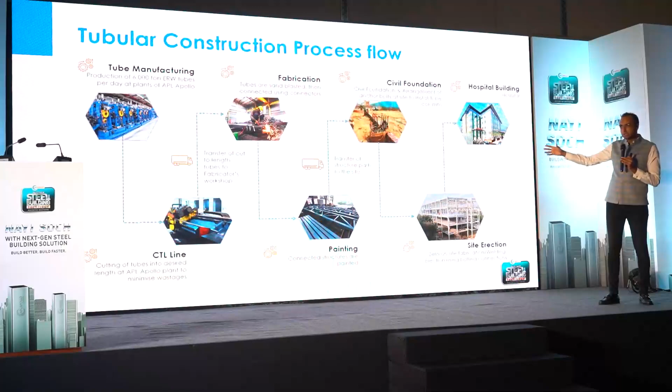Civil works, tubes get processed, fabricated, connectors get welded, and then the material goes on site, it reaches for erection. That's how we achieve the speed of 8 to 9 days per slab.

So one of the reasons, after interaction with a lot of friends in the industry, we figured out that there are like 5 reasons why designers from the structural world don't like to put more tubes in their designs.

The reason is the non-availability of larger sizes, which are required for high-rise buildings, and limited size range.

Large MOQs which tube companies ask from the contractors, from the developers, which makes the consumption of tube a bit difficult. High lead time as well, and wastage in tubes, which the fabricators have to carry cost for.

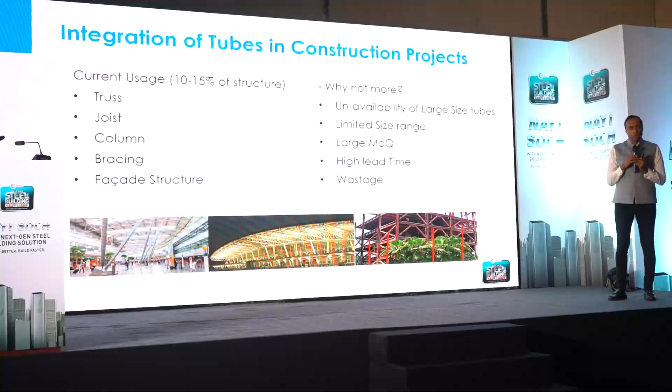So at APL Apollo, we have tried to work on all these concerns and address them, so that the steel construction, the tubular construction, becomes more beneficial to everyone.

Now the applications, what we have seen, what we're trying to promote, is for any kind of high-rise structure, whether hospitals, housing, schools, courts, hotels, malls, offices. Many large developers are present here.

We have people from Warehousing Association of India also, supporting warehouses, food parks, cold storages, factory structures, process buildings. For all these buildings, tubes are beneficial.

Aviation hangars, many fabricators here are working with the Airport Authority of India for hangars, and the very upcoming field, which is data centers.

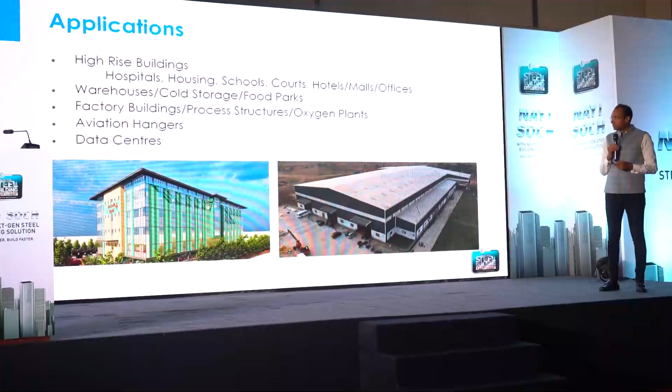So steel tube versus conventional RCC. This is the working where we see how we save time, how we save cost. There is already a proof of concept here.

Which shows that a steel building, tube building, can be constructed on an 8-day per slab timeline, versus RCC, which varies from 20 to 30 days depending on the complexity of the infrastructure.

I'm sure there would be some exclusive projects where RCC contractors must have achieved high speed, but that's very rare. We are taking the average.

You save 16 days per slab; for a high-rise 15-story building, you save 240 days, and then it can benefit you in terms of higher carpet area. Your project will start early, which will boost your internal rate of returns.

So the project becomes more financially viable. And against that, what we pay today is $3 per square foot cost, which is like 250 rupees per square foot.

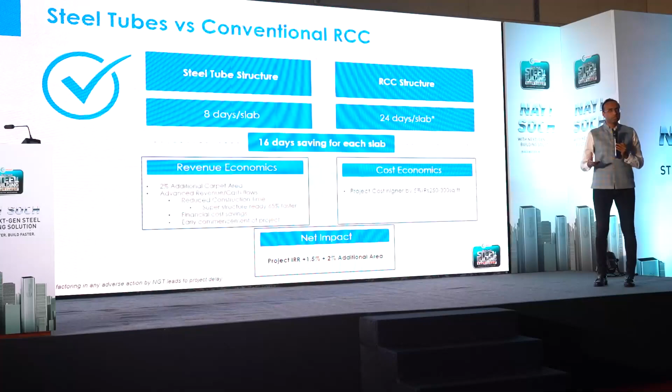Against that, if we factor in 2% additional carpet area, that will nullify the additional cost at just one go.

So these are the benefits. Construction time for the superstructure gets reduced by up to 30 to 50%. The project cost will be low if the building gets handed over early.

With early commencement of the project, whether it's a hospital, hotel, mall, or office tower, it lowers the financial cost, the finance cost.

We get the advancement of cash flows, better IRRs. The project is environmentally friendly. It doesn't add dust into the air, which adds to air pollution, and it doesn't consume groundwater, which leads to the depletion of groundwater levels, which Indian cities are facing right now.

There is a recyclability factor in steel. After 50 years, 100 years, you can disassemble the welding and benefit from the recyclability.

Strength is superior, resistance to seismic loading is better, so that's another benefit. And we have seen, we have done case studies where we also get extra clear height of up to 6%.

So again, NAYI SOCH is the theme here for tonight. The next NAYI SOCH is environment, which everyone is talking about, whether it's private or government. So there's a global study which suggests...

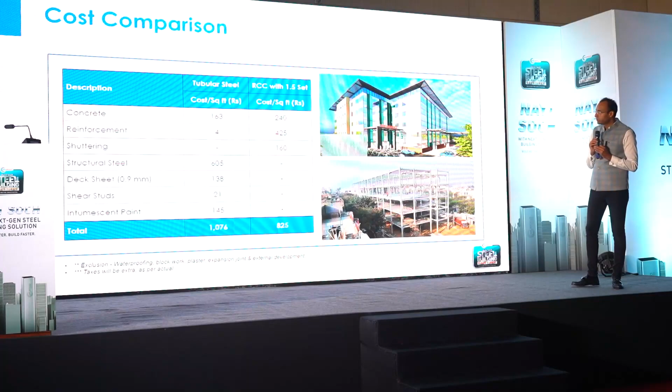This is the cost comparison I was talking about, 250 rupees per square foot. So these are the main factors for the skeleton of the building. There are six to seven factors: concrete, reinforcement, shuttering, structural steel, deck sheet, which takes care of flooring.

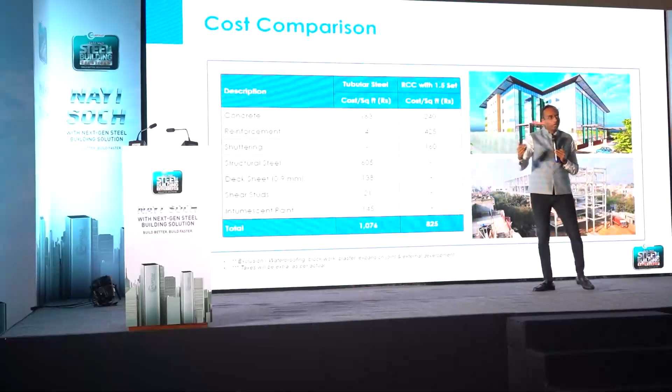Shear studs, and fire intumescent paint, which is a very important factor in steel buildings. This is tubular steel. This is RCC. Concrete is there in steel because we use concrete fill tubes. We have a super specialist from IIT Hyderabad, Professor Madhavan, who's going to talk about concrete fill tubes soon. We put reinforcement, shuttering, but you don't need that in tubular with structural steel, deck sheet, and shear studs. RCC structure could be 825 rupees per square foot, and steel is 1,076. So that's the 250 rupees per square foot gap.

Against that, the benefits are straightaway: in India, the average real estate price is 10,000 rupees per square foot. You get 2% extra saleable carpet area, which nullifies that cost on day one.

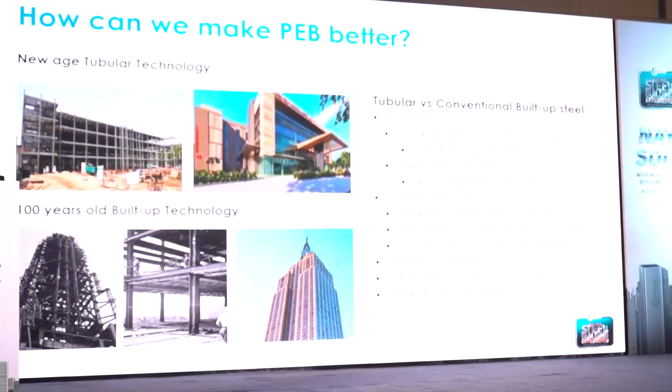The other thing we have here is how to make steel construction better, how to make steel efficiency better. Built-up sections have been used for ages. We have the Empire State Building, beautifully built 100 years ago, all on built-up sections. But how do we better this? How do we come up with something new?

What we are trying to propose is that if the structure is 100% tubular, we have seen that the project could be done 20% faster. The lead time for supply of tubes is much lower than making built-up sections by multiple fabricators.

The connections, some of the designs are here. We are doing a lot of research and we have used these designs on live projects as well. So connections are easy and project costs come down. For a built-up section beam, you need to shutter and encapsulate it. With tubes, we can get away with that, so carpet area gets added here. And the added benefit is less consumption of steel.

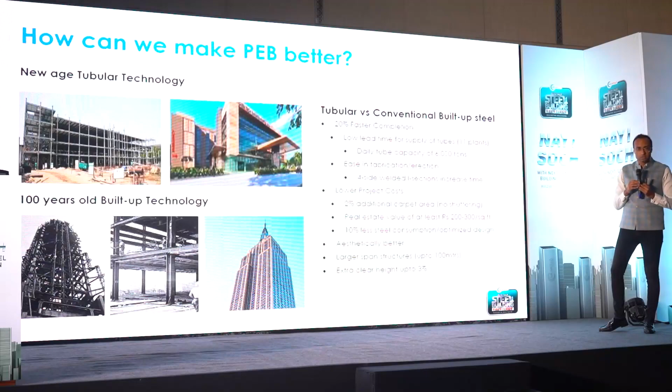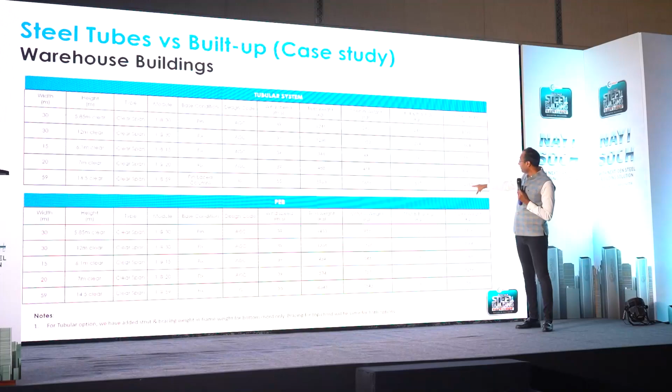There are many live examples and case studies which suggest that doing a steel structure on tubes versus built-up, we can save 5% to 20% steel. Tubes are also better for large span structures, and we get extra clear height with tube versus built-up. This is one case study where we took examples of multiple grades, with width 30 meters, height 5.85 meters, so that's the clear span. We factored in wind speed, truss weight, and column weight, and we found the frame weight in tubular is 12,000 kg versus 15,891 kg on built-up with the same parameters.

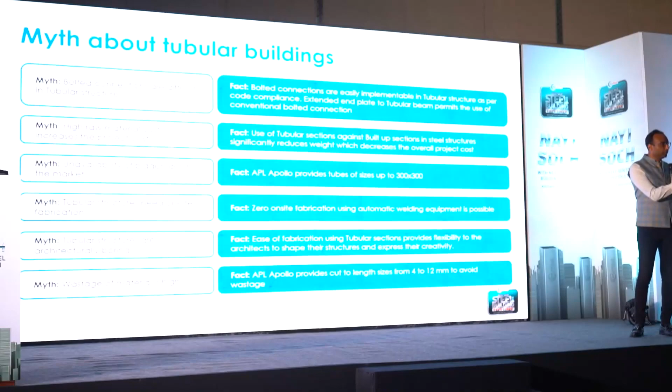These are some myths our fraternity has in mind, and we have tried to address all of them regarding tubular construction. One myth is that bolted connections are difficult, but that's not the case. We have live examples of these connection plates and connectors used in live projects.

Then, raw material cost is high. Yes, when you compare tube versus steel plate, it will be higher. But then the fabrication cost gets reduced, and ultimately on a per kg basis, the cost comes down.

Non-availability of large size sections — yes, but in the last 4 or 5 years, companies like APL APOLLO Tubes have worked quite aggressively to come up with larger size sections and make them available for contractors.

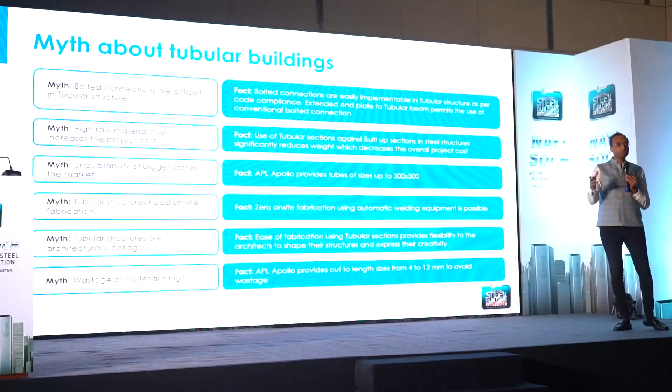Then the myth is that you need on-site fabrication. That's not correct. We have our friend from Sam India, who recently executed 25 lakh square foot across 7 hospital projects in Delhi, and they can tell you that 15,000 tons of structural steel was fabricated, and hardly 1% of that was done on site.

Then there's the myth that wastage of material is high — that's another reason why fabricators shy away from using tubes. But at APL APOLLO, we send cut-to-length sizes to the fabricator. So if the design requirement is 4.5 meters, 7.2 meters, 8.9 meters, whatever, we cut the tube to that size and deliver it to the fabricator.

And I don't know why my team put this, but the myth is that tubes are boring — that's not true. In fact, architects use tubes to improve the aesthetics of buildings, whether it's an airport or a railway station.

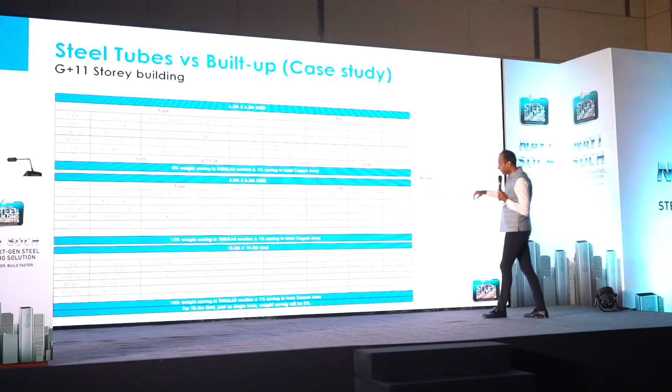This is the same matrix for G+11 story building. We'll see that the weight of the structure for a 6.3 meter by 6.3 meter grid in tube is coming 6 tons, and in built-up it is coming 7.3 tons. For 8.3 meter grid, 11.7 tons and 13.2 tons for 10.3 meter by 10.3 meter grid. Again, tubes are showing better results, so there's a clear saving of 10% even in high-rise structures.

And then the other benefits are high carpet area, because for a built-up section you need to shutter it, you need to encapsulate it. In tubes you can get away with that, and you can build more carpet area.

Now this is what we are really proud about, and the reason why we requested everyone to visit us, because with that conviction and confidence that yes, it can be done, we have done this: 7 hospital buildings, 6 sites given to the contractor Sam India. 2.5 million square foot, 15,000 tons of steel work done in an average of 90 days. When we calculate, the fabrication drawings were finalized, and within 90 days 15,000 tons of steel was manufactured, dispatched to the fabricators, fabricated and erected on site.

I'm sure Mr. Karan Agarwal from Sam India will take you through the journey of this and share his experience.

Now we are working on a lot of other structures, whether it is hotels, night shelters, or office towers. We have our friend from Supertech, Mr. Khanna, who recently got a G+15-story building in Noida on tubes. The work is yet to start, but I'm sure they'll be happy to share their experience on the same.

Group housing projects also we are doing. One case study again to strengthen our viewpoint of built-up versus tubes: this was a 13,000 square foot oxygen shed building, which was done in 15 days. Mr. Jitendra Chok from Fab India did that, and he's present as well.

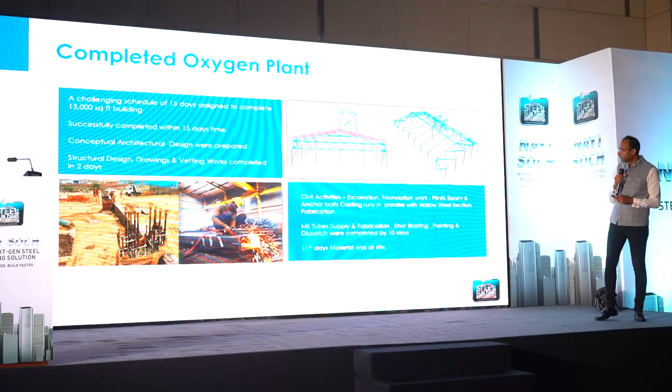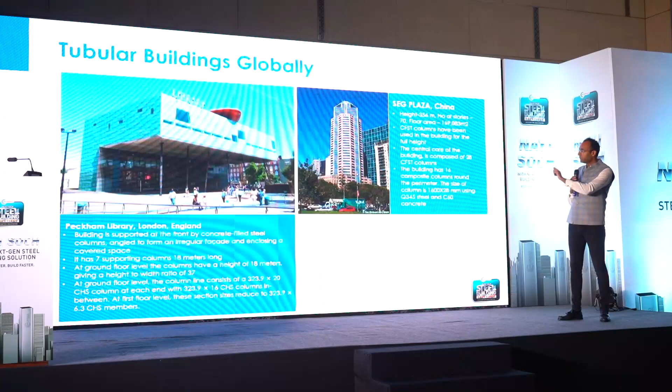And then all the aesthetically good buildings. Dr. Anubhav Gupta, our friend from Skeleton, has done a group housing project in Jammu, all on tubes. And then again China has another 70-story tower, and London, which is a more aesthetically pleasing city, they have also used tubes to make their buildings beautiful.

So why don't we see many of these examples in India like we see outside? I guess it's that 250 rupees per square foot extra cost which everyone calculates. India is a price sensitive market, so people shy away from going on steel. In India, project deadlines don't matter much; we know developers and contractors keep delaying their projects, and there isn't a very harsh penalty for the industry. RCC work can be done with unskilled labor, but in steel you need skilled labor. India is also the second largest producer of cement, so availability of cement makes it easier for contractors to go with cement RCC.

Last section, tubes are also not available easily, so that's another factor which stops contractors from using steel, and high grade steel also.

Before we started this presentation, I was having a chat with Professor Madhavan from IIT Hyderabad. He was insisting that we have to take a quantum leap now to talk about not 350, not 450, not 550, but 690 grade steel. I'm sure with such visionary outlook from friends like Professor Madhavan, we're going to take that leap soon. Also, not many contractors carry expertise of quality engineering and workmanship, but I can proudly say that there are PEB contractors in this very room who are capable of doing very good work on steel structures.

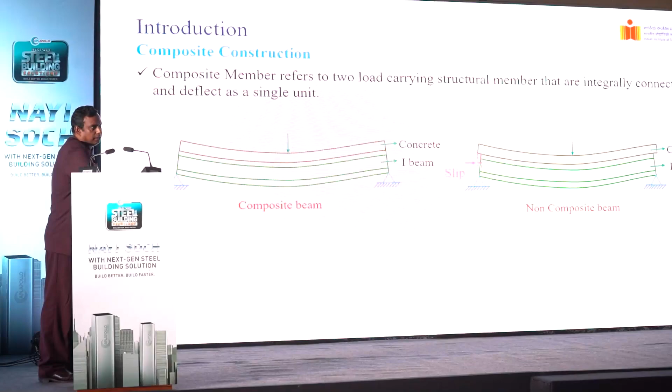When you look at composite members, there are two load-carrying members integrally connected that behave as a single unit. On the left is a composite beam, and on the right a non-composite beam. It looks the same, but when you load the structure, there will be slip on the non-composite beam, while there will not be any slip on the composite beam. So compatibility is established in a composite beam, whereas slip occurs in a non-composite beam.

As I told you, you have a tubular structure, and you add concrete to that, and what you get is a composite tubular structure.

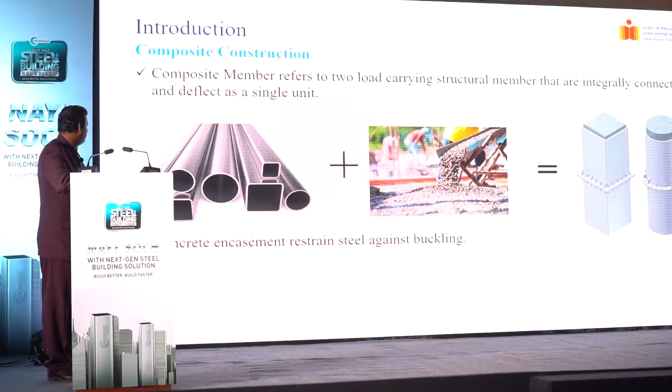What does concrete actually do, and what does steel do? Why can't we just use a tubular structure — why do we need to fill in concrete? Can we make it light by not filling it? Why should we have concrete in it? The major reason is simply to prevent what is known as local buckling.

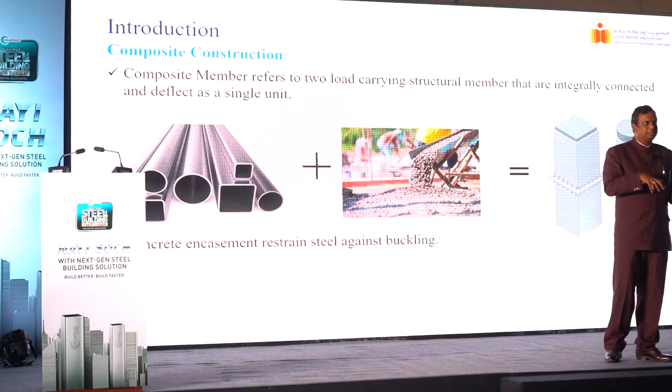You want to reduce the quantity of steel and make the sizes bigger, but if you don't put something in it, there's a possibility it could buckle inwards, which we call local buckling. So to prevent local buckling, if you add a material like concrete, it adds strength while also preventing the formation of local buckling, which is an undesirable failure mode. What we need to achieve is the complete ultimate load capacity, so reducing local buckling is the goal.

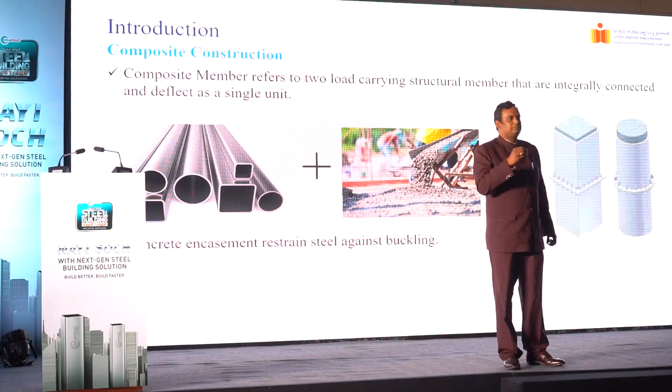Another important thing about concrete is that it acts as a heat sink. When you have a tubular structure subjected to fire, steel tubes don't have a chance — steel is a very good conductor of heat, leading to failure of the structure.

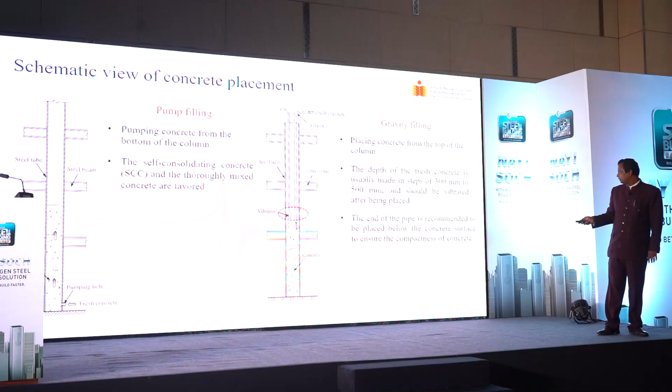In terms of component behavior, the most useful component from a strength point of view is a tubular structure, but there are some challenges with connections in circular tubular sections. From a strength point of view circular tubular sections are very good, but for connections and aesthetics, square and rectangular hollow sections are often preferred. The confinement provided by the steel tube is much higher, so the load-carrying capacity, simply because of the geometry, is much higher in a circular tubular section.

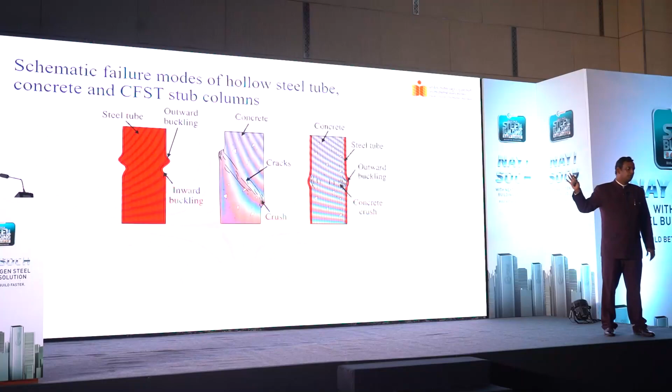This is how the failure mode would look: if you look at the steel tube, it has both inward buckling and outward buckling. This is what I call local buckling, which I mentioned earlier when introducing the topic.

I move around once in a while because I was told that if you move this way, people don't sleep. When I teach a class of 20 to 30, it's a class. When it's more than 50, it's a performance.

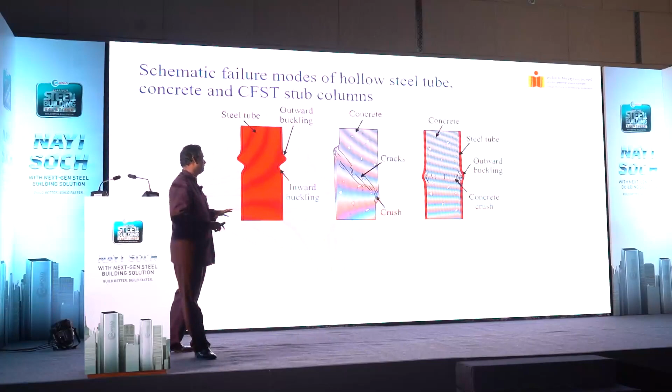So you have this inward and outward buckling. This is a steel tubular structure, but if you have regular concrete, then you have cracking and crushing that takes place at 45 degrees. But when you add the two together, you drastically reduce your inward buckling.

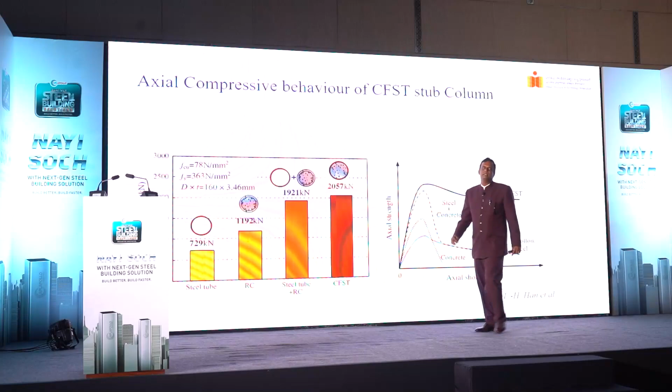Why is ductility so important? Because that is the only weapon we have to protect structures against seismic effects.

Our nation in 1970 had different seismic zones - Zone 0, 1, 2, 3, 4, and 5. Then somewhere down the line we discarded zone 0. Then we said zone 1 is also gone. So now we have zones 2 through 5 - low seismic, mid seismic, high seismic.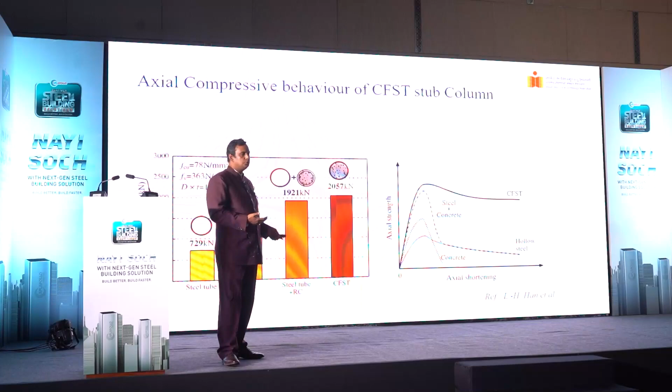So we cannot escape seismic activity. We have to design every structure because some level of seismic activity is bound to happen, because plate tectonic movements have occurred such that we have to design for seismic forces. We cannot run away from the problem; we have to confront it and solve it. And the only solution that we have today is tubular sections with concrete infill.

When a steel tube is subjected to tension, you get a crack happening at the center, a big crack. But when you fill it with concrete, you get micro cracks instead, so the member fails in a ductile manner. When a member fails in a ductile manner, it is a desirable failure mode.

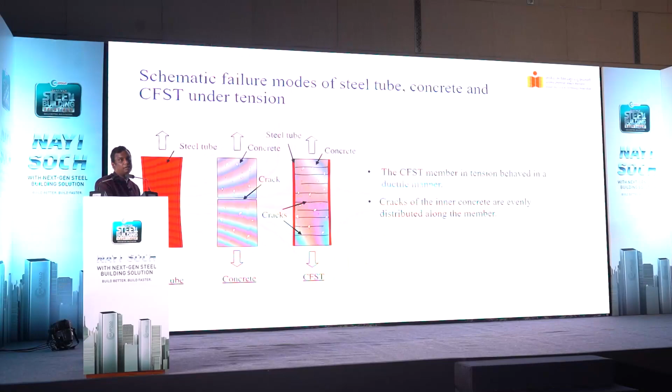Then we subject it to torsion. The steel tube alone doesn't resist very well, and concrete alone also develops cracks. But when you put concrete inside a steel tube and try to twist it, you get much higher resistance against torsion for the infill concrete section.

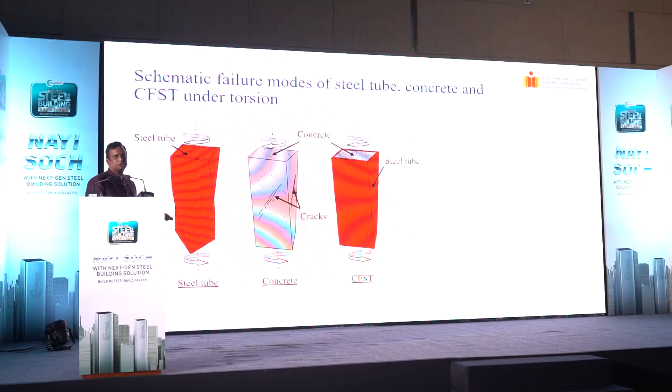So what are the applications of CFST? Usually it's the main columns in subway stations. That is when I think CFST structures became more popular. In underground subway stations, size matters because you need more space for trains, not for columns to occupy. The strength of the structure is important, but functionality is more important than strength. So reducing the size of columns becomes a challenge.

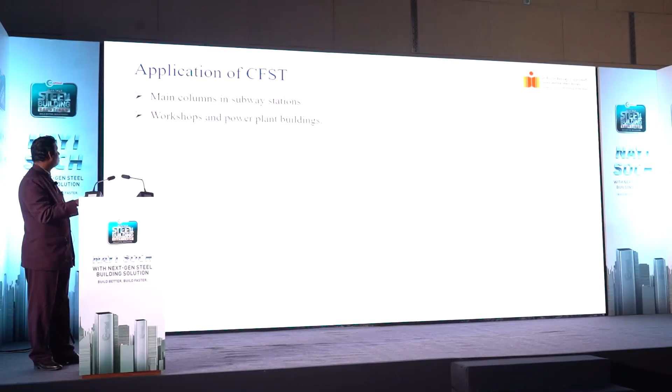So they went for tubular structures filled with concrete in most subway stations. This is common in most developed countries, like Singapore, where a lot of underground subway stations use this. New York has a lot of subways too, and London - all these use a lot of tubular structures. Workshops and power plant buildings need more land space. Again, high-rise buildings, multi-story columns and beams - they all have industrial and tubular structures.

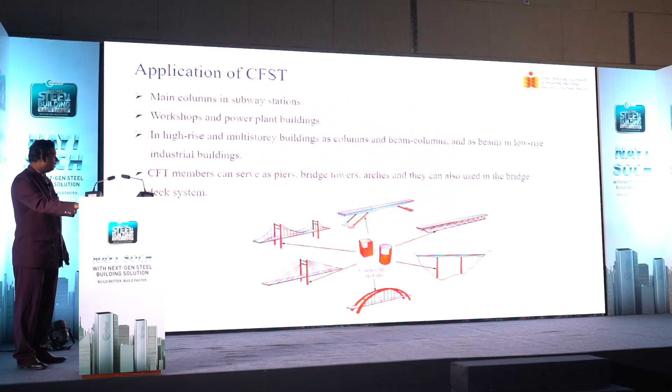Now this is very much used for bridges. Bridges are picking up in India, and tubular structures are key to achieving large span structures. This is another application, especially in China - they have taken it to another level, because a lot of transmission towers in China use these tubular structures filled with concrete.

We also have these kinds of structures, especially if you are in Hyderabad coming to the airport - you will see a lot of these tubular structures, but they are not infilled with concrete, just dummy tubular structures, so the sizes are huge. The objective is to reduce the use of steel and concrete, but still achieve what we wanted. Infilling concrete inside a steel tube does wonders for us.

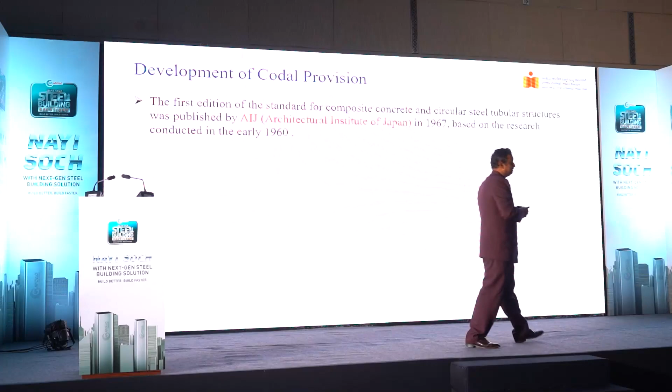So let's talk about some hi-fi stuff like codal provisions. The first thing that was done was in 1967, based on research done in the 1960s with the Japanese. It was published in Japan in 1967 by the Architectural Institute of Japan.

So when you think about architecture, don't think about architecture in India. In Indian architecture, the fellow will not touch structures even with his left hand. But in Japan, all buildings come under architecture, while all non-buildings - bridges, towers and other things - come under structural engineering. So the Department of Civil Engineering has structural engineering which does everything except buildings. The Department of Architecture also does structural engineering, but they are focused only on buildings. So architecture in Japan means something a little different.

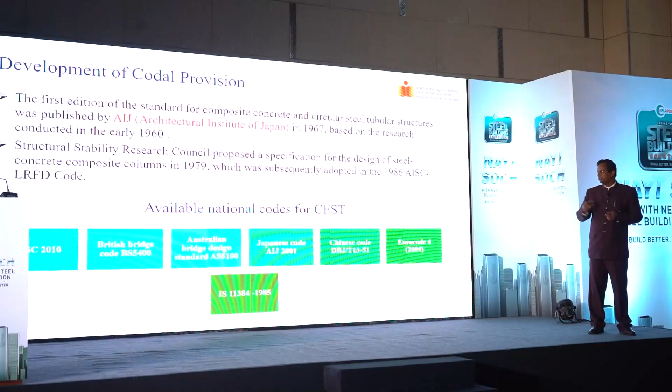Then there is something called SSRC, the Structural Stability Research Council - they came up with a code in '79. These are some of the codes: AISC 2010, British code is there, Australian code is there. Of course British code is now not very effective - it has been morphed into what is known as Eurocode, and Chinese code is there. And last but not the least, we have a long way to go - tubular structures code is also there, but R&D has to be done significantly into the technical content of the code.

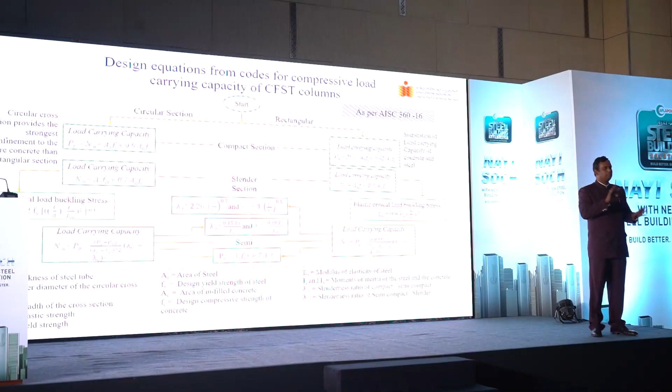Circular section, rectangular section. Just to understand, the gist of it is the strength comes from three components: one is the steel tube, one is the infill concrete, and inside the infill concrete, if you put a rebar, that also adds strength. A plus B plus C is the total strength. That is all they are saying by adding this. So this is steel, this is concrete. Since we are not talking about rebar inside, I neglected that term. So you add these two together.

Why is it 0.85 for rectangular and the same thing is 0.95 for circular? Because circular is better in resisting local buckling. So the code inherently recognizes that and gives an additional 5% discount for people who are using circular sections.

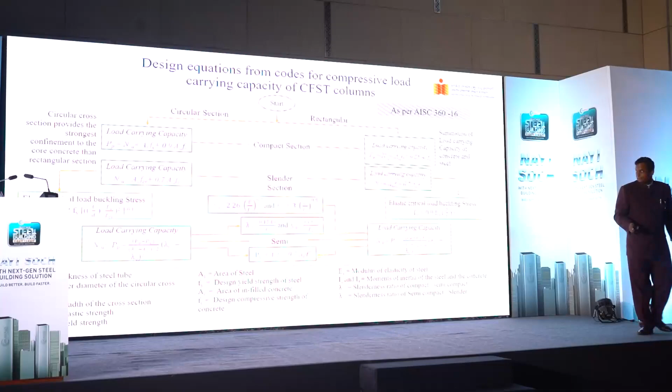That's the okay, so this is all the gist of it, but it's all available in the code. I didn't do anything new, I just put it together. This is how you design it, but nothing fancy. You just put it in an Excel sheet. A 10th grade fellow can put it.

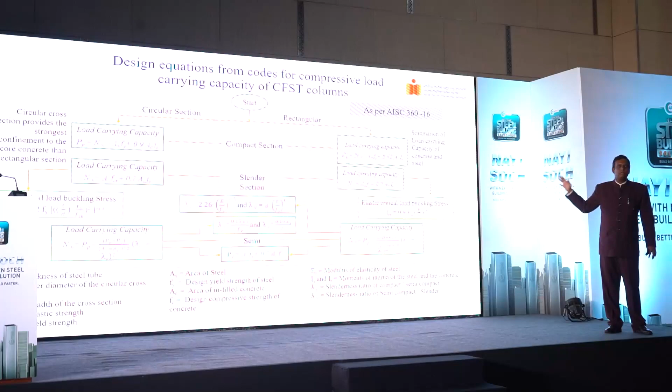What is most important is not to do all these calculations, but to have a general view of: is it making sense? Am I doing the right thing? What is wrong? Is it the connections, or am I putting the concrete correctly? Is the strength the problem? The thickness the problem? Slenderness the problem? That kind of intellectual thinking is more important than running day-to-day things. I do understand that design offices run on a production basis, but it's equally important for you to understand the basics of the philosophy behind these things.

Again, this is for the BS code, same thing. But rather than this, they say circular as well as non-circular. Here they have these three components: steel component, concrete component, as well as the rebar component. They have all these equations that you plug it into.

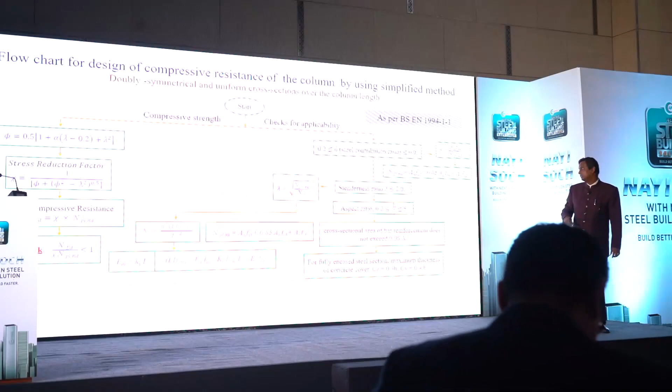Again, this is another thing called the simplified method. So the other one apparently is a complex method, so they came up with the simplified method. It's all the same, but if you ignore the right side portion, this is just the checks.

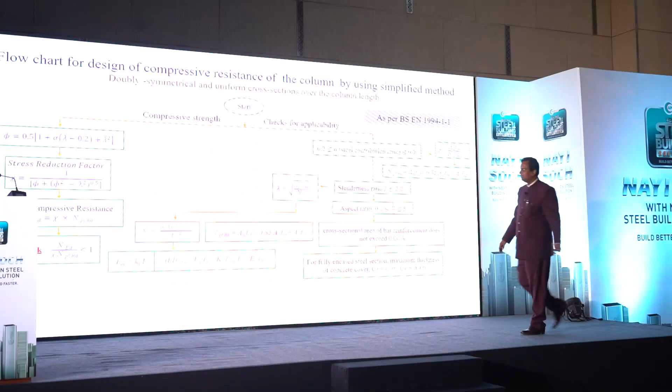This should be familiar to all of you because this is a regular steel design, IS 800 type of structure. So what you see on the right side is just the jugglery you have to do to make sure it works there. But on the left side, what you see is day to day: phi factors, stress reduction factors, lambda factors, and this is an imperfection factor. Alpha is an imperfection factor. This is a slenderness ratio. This is a phi factor, and this is the reduction factor that you multiply by using stress.

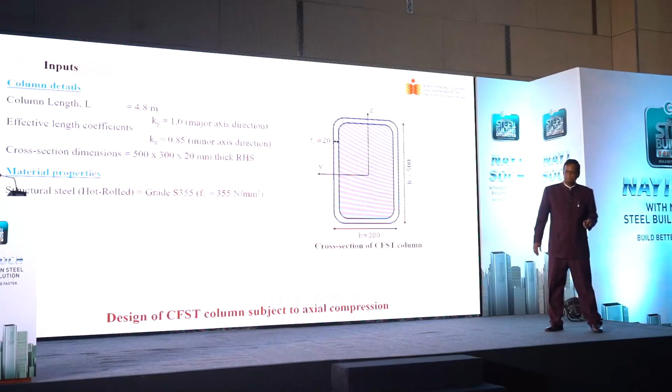I don't want to go into the details because I didn't know I was given only 15 minutes. So sometimes I tell my people I'm worse than a politician - if you get a mic, I will not come out. So I just want to show you that it's not that difficult.

It's just something you can do very quickly if you know the basics of it. You just do all these things, and then you say this is what it is: major axis slenderness, minor axis slenderness. And then put it here like this, okay. And there you go.

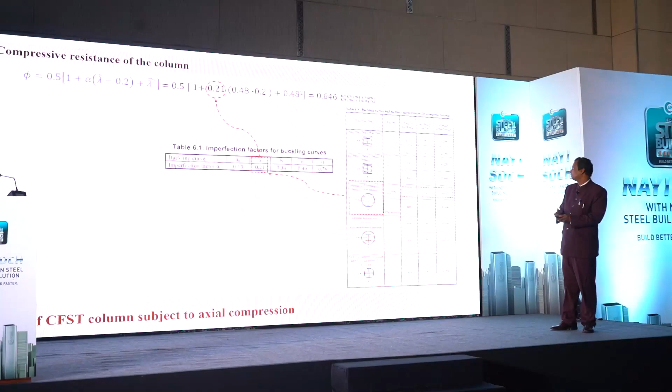And this is where the Eurocode comes into picture. You have a circular section, then you have this code, and they say that the imperfection factor alpha is 0.21 because it should be the a buckling curve. So you put it there, get the phi, voila, you get it done.

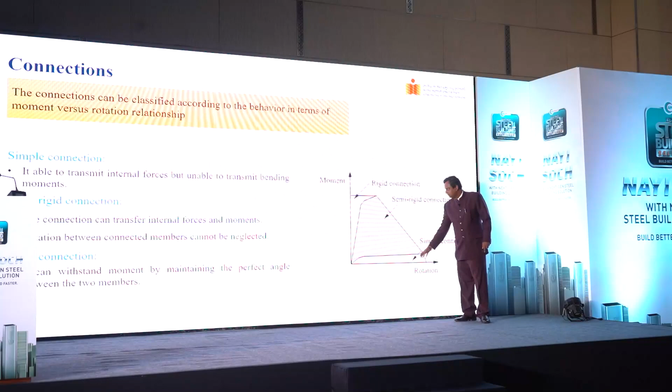So what you see here is the simple connection. This is the semi-rigid connection. This is the rigid connection. But just for your information, a rigid connection is also not truly rigid. If you can achieve 90% rigidity as per American standards, it's classified as rigid. You're almost there, so you don't look for 99.9% accuracy - if you're more than 90%, they classify it as rigid.

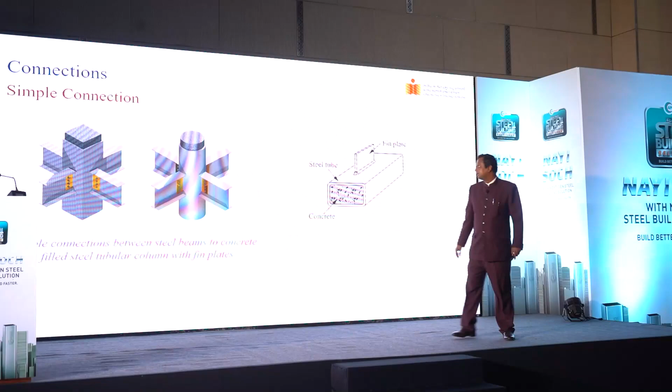So these are the simple connections that you can see. This is what we call the fin plate, so you attach the fin plate here. That is the yellow color stuff that you see here, and then you have an I-section attached to that, and that is how you make the connection. And then this is a simple beam to column connection.

Connections are very, very important, my friends. Okay, very, very important. If you know how to do connections, I think you will be a very good structural engineer because you need a little bit of understanding of everything. Members rarely fail; the failure usually starts with the connection. When the connection fails, it does not fail by itself - you bring 2 or 3 members together along with it. So that's the problem with connections. Dealing with connections is extremely important.

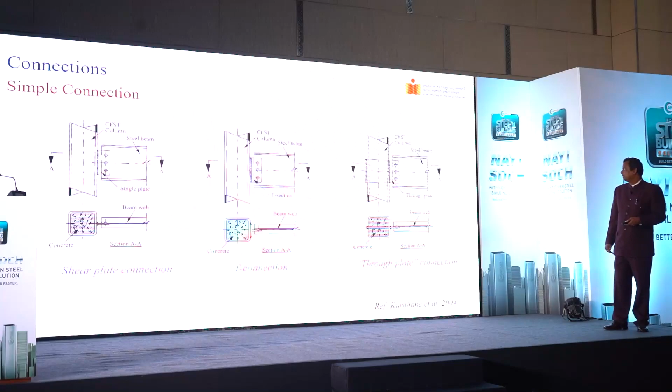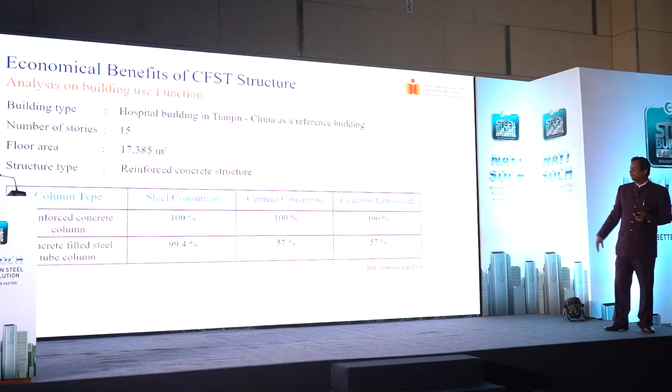Okay, economical benefit of CFST, this is just some type of thing. I think Mr. Gupta had already talked a lot about it, but I just wanted to give you a brief feel for it. Actually, the cement consumed is much lesser, the concrete consumed is much lesser, and the strength is very good.

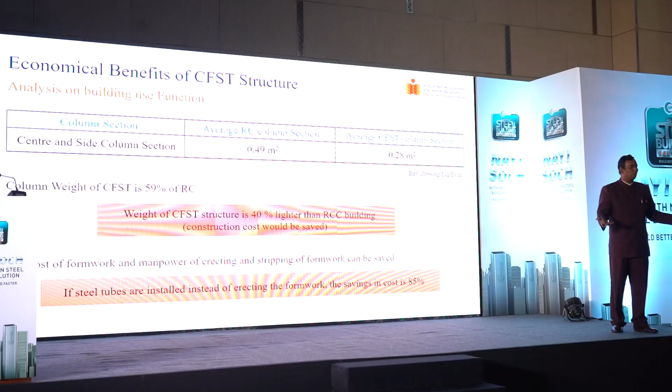A lot of formwork gets stolen because it's steel, right? So when they strip the formwork and keep it in place, some people come in a truck and say that they have been asked by a contractor to pick it up and take it, and then the next day the real contractor comes and says, where is my formwork? It's all gone. So taking care of formwork is also a full-time job.

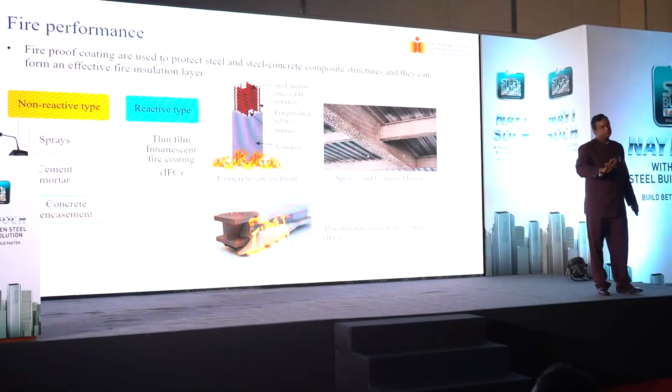Two years back, I was in Japan for this, prior to COVID, just 2-3 months before COVID. I was taken for a tour of the new steel structural buildings that were built for the Olympics, which got postponed, I believe - it was supposed to happen in 2020. Fabulous work, fabulous work. Okay, but when I looked at it, this is what they have used - they just used sprays and cement mortar to act as a fire protection mechanism.

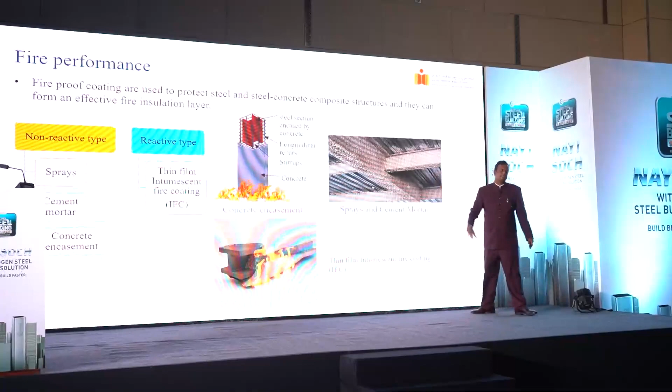Okay, intumescent coating - the building where my office currently is has intumescent fire coating. So what is intumescent fire coating? I don't know, perhaps everybody knows it or not. It's very similar to what you have in an airbag in a car - impact, right, sudden impact, it blows, right? It just gives a space. Same thing happens in intumescent paint.

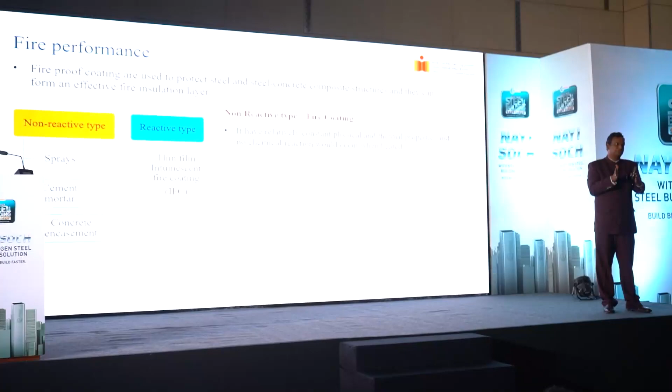When you get heated, the thickness of the intumescent paint increases by 50 times. When it increases by 50 times, it reduces the amount of heat that would be absorbed by the steel structure by providing a protective safe net, I would say. Okay, again, gory details - test results show that by providing the intumescent paints and other things, you can simply increase the fire rating.

Recently used to build a hospital structure in just 150 days. PWD planned 5 hospitals last year. Structural work at all the sites is almost done. The 1900 plus bedded GTB hospital was the largest built-up of more than 6 lakh square feet.

Conventional construction technology would have been too time consuming. The pre-engineered steel tubes were selected to complete this challenging project in less time. 80 to 90% of the structure was built on 4 section sizes.

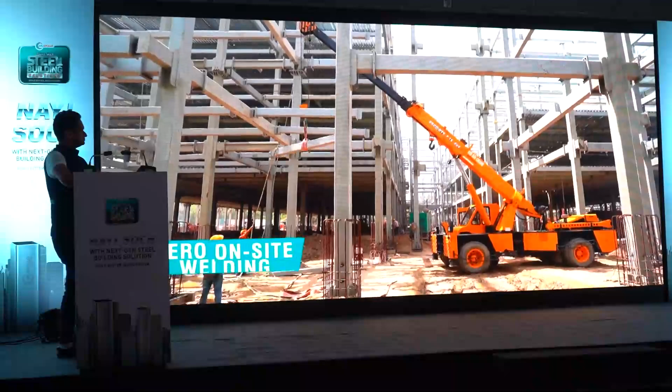Drywall and deck slabs were erected and cast on tubular steel structures. All steel fabrication work took place at fabricator workshops with zero on-site welding, only structure assembly with high-strength bolts. This was made possible only with APL APOLLO Steel Building Solutions.

Thanks to tubular construction that offered the perfect balance of speed, quality, cost, and environmental friendliness. APL APOLLO Steel Building Solutions give you lower project times, easier execution, and structure optimization. APL APOLLO Steel Building Solutions, a true revolution for future construction.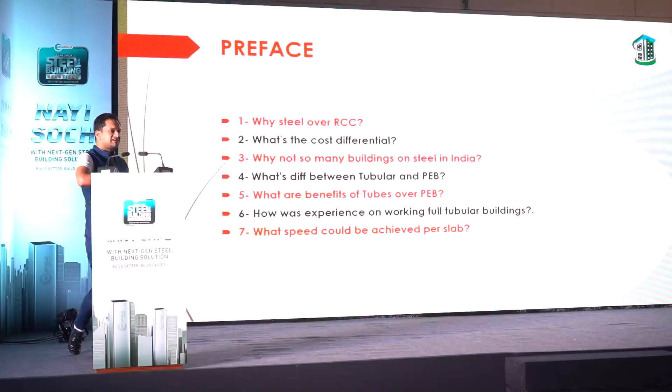Why we consider steel over RCC. Now, with the experience of completing these hospitals in a record time of 150 days, we are in a better position to answer why steel is considered and preferred over RCC. What is the cost differential between PEB structures and tubular pipes?

Why aren't so many buildings in India made of steel? What's the difference between tubular and PEB? What are the benefits of tubes over PEB? How was the experience of working on full tubular buildings? What speed could be achieved per slab?

This is the question which we were also doubtful about before starting these 5 hospitals, which we started in the month of November 2021. So after completing these 5 structures in a span of 150 days, we can recommend to any contractor, builder, or establishment who wants to finish the building in a span of 9 to 12 months, irrespective of stories.

The first best benefit we felt after completing these hospitals was the speed. Steel structure speed is the fastest we have accomplished in the last so many years.

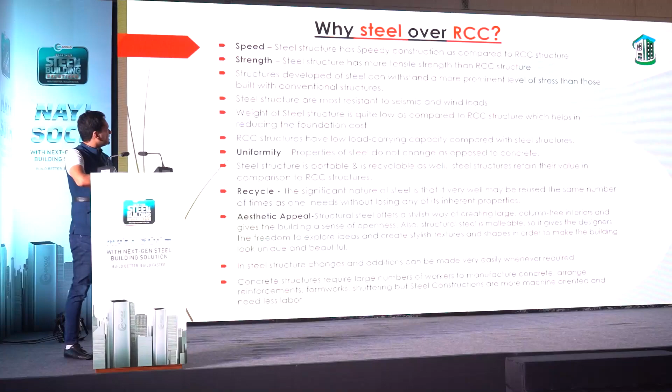The steel structure has more tensile strength than RCC structure in any case. Steel structures are more resistant to seismic and wind loads. The weight of a steel structure is quite low as compared to RCC structure, which helps in reducing foundation cost. This is the most important point, that it actually gives a cost saving to any establishment going for new construction.

Then comes the point that RCC structures have low load carrying capacity compared with steel structures. The third part is uniformity: properties of steel do not change, as opposed to concrete. Steel structure is portable and recyclable as well. Steel structures retain their value in comparison to RCC structures for the coming 60-70 years.

Recyclable. The significant nature of steel is that it can be reused as many times as needed without losing any of its inherent properties. So after 50 years, if we get bored of the design, we can demolish the building, recycle the steel, and put the same steel into a new concept and design. So recyclability is the best option, which we won't get with RCC.

The aesthetic appeal: structural steel offers a stylish way of creating large column-free interiors and gives the building a sense of openness. Also, structural steel is malleable, so it gives designers the freedom to explore ideas and create stylish textures and shapes to make the building look unique and beautiful. So we don't have to compromise on the exteriors and interiors of the building.

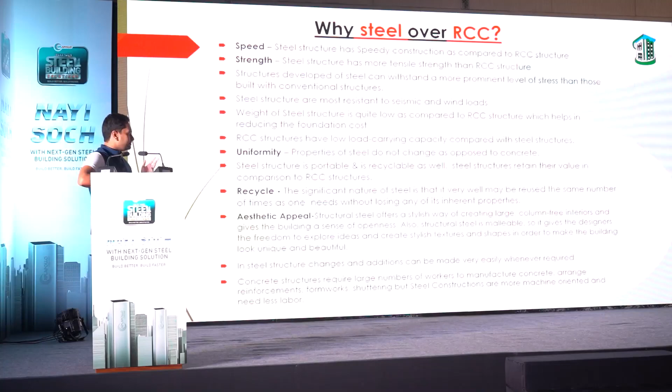In steel structures, changes and additions can be made very easily whenever required. So it gives flexibility to the architects, consultants, and users to design the building as per their choice.

Concrete structures require a large number of workers to manufacture concrete, arrange reinforcements, formwork, and shuttering, but steel construction is more machine-oriented and needs less labor. Nowadays we are struggling with labor. The client is always behind us to complete the project before time or on time. We're still doing a lot of conventional buildings for other departments. The main problem we face every day is labor. The best part about completing these hospitals was that we didn't have a hue and cry over labor—everything was machine based.

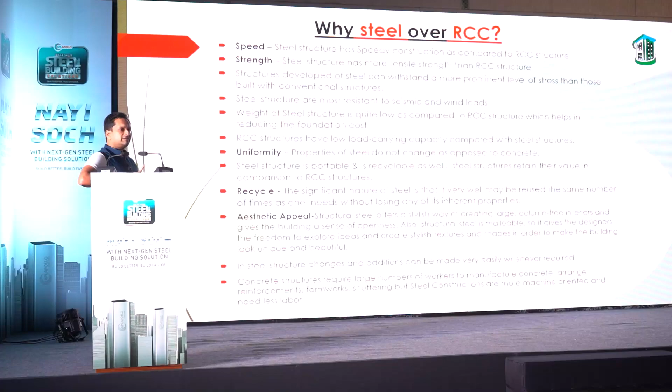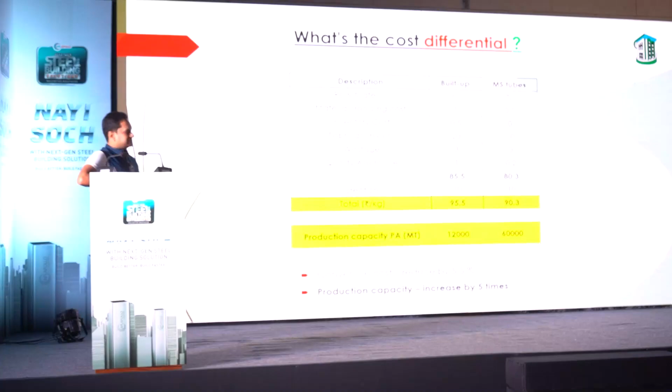But with tubular sections, Mr. Anubhav Gupta has already explained that they supply cut-to-length pipes as per requirement, so the wastage is zero. We have consumed around 16,000 metric tons of tubular pipes in hospitals, and the wastage came out to around 0.2%. So the wastage savings are significant compared to built-up sections. As far as erection is concerned, the cost remains the same. Overall, we are saving 5.5 to 6% compared to built-up sections.

Second, speedy delivery. We haven't faced any problems with the availability of tubular pipes from Apollo. The readily available sections are easily available in the market, so as far as speed is concerned, material is not a problem.

The next question is why so many steel buildings are still not common in India. It's very common to see public buildings with structural steel in the US and Europe, but in India, despite being the third largest producer of steel, we still don't have many such buildings. The main reason, the perception we all have till date, is the cost—that a steel building would be a costly affair compared to an RCC building. But now that perception has totally changed.

If we talk about cost with respect to time, we save 50% of time, and time is money. So for time-conscious clients and government projects, we can definitely say a steel structure is an economical option as on date. Another reason we don't find so many steel buildings in India is lack of awareness. Due to lack of connectivity with technology, steel industries were unable to seek the adaptation, but now the steel industry has seen adaptation of novel steel modular frame systems on construction sites.

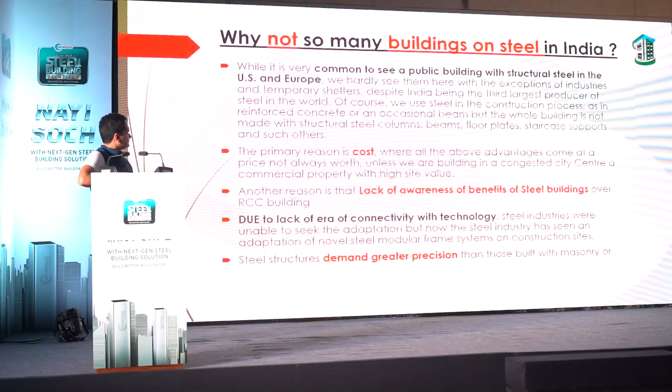What's the difference between tubular and PEB? Both sound very common because both structures are related to steel. But basically, PEB is a pre-engineered building, and tubular sections are also pre-engineered in their own way. The difference is the material. Tubular is basically more towards hot-rolled sections and square tubing, which is readily available in the market—you don't have to fabricate those tubular sections. Whereas PEB is basically a three-plate design all the way through the production of the steel; we have to cut the plate and weld those plates to make the column. So this is the basic difference between tubular and PEB.

What are the benefits of tubes over PEB? What we felt is lower steel consumption, hence lesser cost of project as compared with PEB.

Speedy construction and time saving in projects because less fabrication and less welding is involved. Minimum wastage of tube due to tubes available in customized length. We don't have to waste any pipes; it's available as per our own requirements, starting from 2 meters and going up to 6 meters.

It's very easy in erection at site and time saving as the complete system is on bolting. We are using high grade bolts and everything is on bolts. No welding is required at site. So this is the best part.

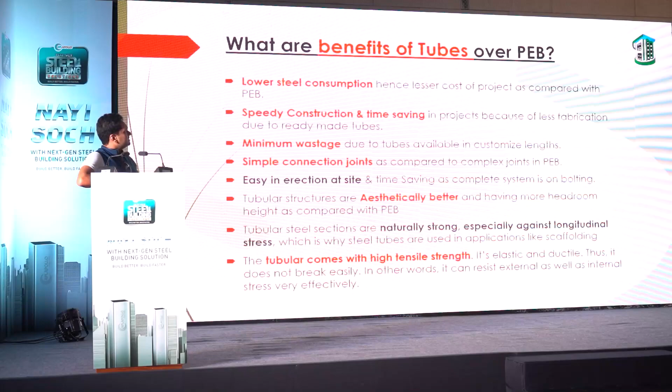What was the experience on working on full tubular buildings? What we felt is tubes were supplied with less lead time. We consumed around 15,000 tubular pipes in less than 90 days, and all the material was supplied within a span of 65 to 75 days to our factory yard. So as far as the supply is concerned, it is totally fantastic.

Fabrication work is reduced drastically because there is no welding involved in manufacturing of these pipes, and zero wastage; burning and cutting loss is almost zero. There is considerable reduction in fabrication cost because of the minimization of the welding process.

Maximum production is 300 metric tons a day. What we achieved in the process of 120 days in our factory, on a single day we achieved 300 tons of fabrication with these pipes, with an average of 150 tons a day, which is not possible in any built-up design.

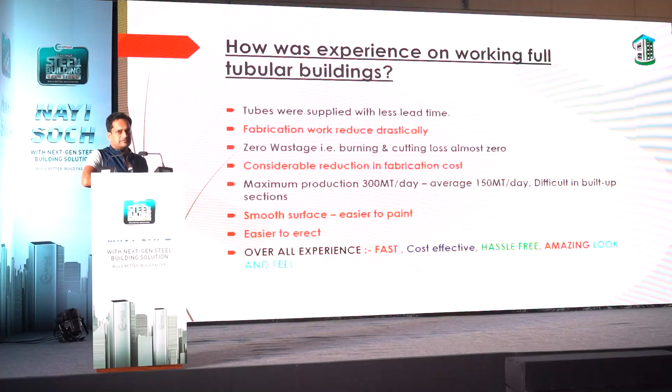It has a very smooth surface, so after the paint it looks good. It's easy to erect with the help of cranes. Overall experience, as far as Sam India is concerned, it's very fast, cost effective, hassle free, with an amazing look and feel after the structure is erected.

What speed could be achieved per slab? We have constructed six hospitals at 6 different locations in Delhi, comprising 9,000 beds, with G plus 4 stories. Total built-up area constructed was approximately 2.5 million square feet in 150 days, with an average of 15,000 to 17,000 square feet of slab casted per day.

If the same area needs to be constructed in any conventional building, this 150 days would approximately double or maybe triple, maybe 300 days or maybe 450 days. It is not possible in any conventional building to achieve these targets.

I will show you some pictures which will give you a better idea of how easy it is to erect the building in 150 days. This is the normal foundation process which every building will follow during the start.

This is the first precise activity. We have to fix the anchor bolts where the column will be erected and will be bolted into these anchor bolts.

Then the column, which is fabricated and painted in the factory premises, is delivered at site and erected with the help of cranes. Then they are tied with the beams, joist beams, secondary beams and main beams, and with better planning, we can erect 150 to 200 tons of steel every day.

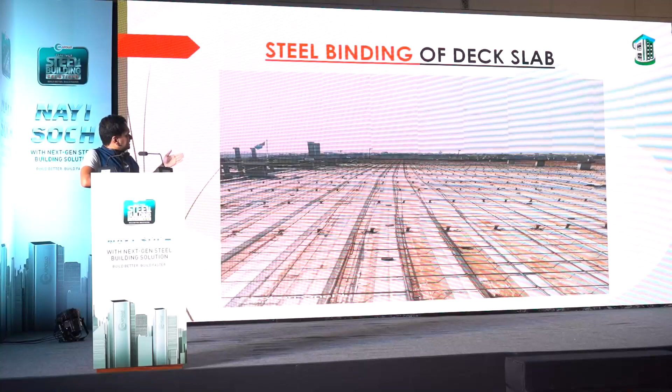After the completion of the structure, we deploy the deck sheets, which are easily available in the market. Then nominal reinforcement is put on the deck sheet, and then we pour the concrete and the floor is ready. This is how we can achieve a cycle of 8 days continuously with better planning.

This is my experience, what we have shared, and in my mind, constructing 25 lakh square feet in 150 days is not possible in an RCC structure. It's only possible with steel tube pipes.

We highly recommend everyone who is looking for a building in a lesser time, within a span of 8 to 9 months, to go for tubular pipes. We have a fantastic experience making these hospitals with tubular pipes.

This is the hospital just completed in the month of April, GTB hospital, comprising 650,000 square feet of area. All the slabs were laid and the top slab is in progress.

After completing the structure, these are the finishing works. These are the wards where the patient beds will be kept. After completing this structure, nobody can tell you that the building was constructed with tubes. Interiors remain the same, exteriors remain the same. These are all the pictures after completion of the structure. The main look and feel remains the same, whether it is RCC or steel pipes.

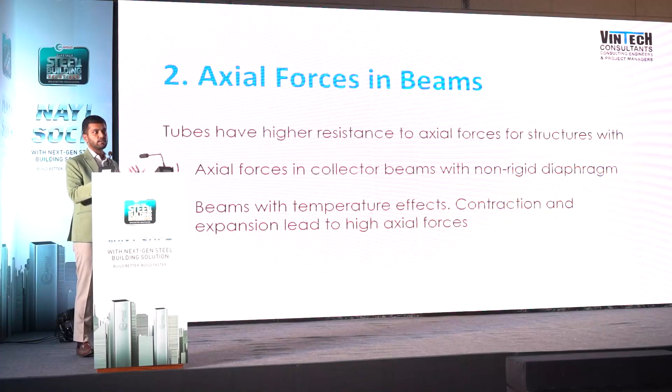It has a rigid diaphragm and it would say that beams won't have axial force action, but that is not actually true. So you have to design all your collector elements for that force, and the tube beam is a perfect solution for that. Also, if you have high temperature stresses in your building, with long buildings that can expand or contract, you will have axial forces in those beams. For anything with axial force, or where you have to resist buckling, go for tubes. That is the best solution.

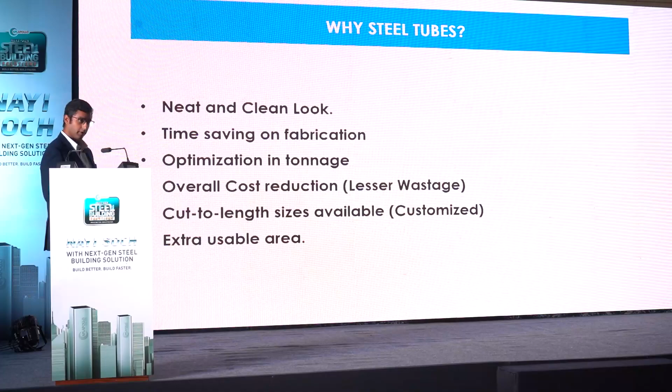Overall cost reduction, wastage is a very big criteria. Of course, fabrication cost too. But with Apollo Steel providing cut-to-length sizes, we are able to bring down the wastage to less than 1%, and that 1% comes from the plates used to make the base plates of the tubes. So if I talk about tubes, it's literally 0%, apart from the fabrication cost decrease. Cut-to-length sizes and customized section sizes available with Apollo coming in—that's a big advantage, and that will really take the use of steel tubes further.

This is the ETABS view of the building being done. We were working on this inquiry for some time, and the developer had a specific requirement due to the Noida authority norms. They wanted completion pretty quickly because after that there would be penalties. So that's actually the reason why they went into steel.

Being a PEB manufacturer, we obviously designed this in I sections. Mr. Anubhav showed us the difference: the tubular structure was about 1,050 rupees per square feet compared to the concrete structure at about 825 per square feet. When we designed it in I sections, it worked out to almost 1,250 rupees per square feet. So the difference of 15 to 20% went up to probably 50%, which was a complete no from the cost perspective from the client.

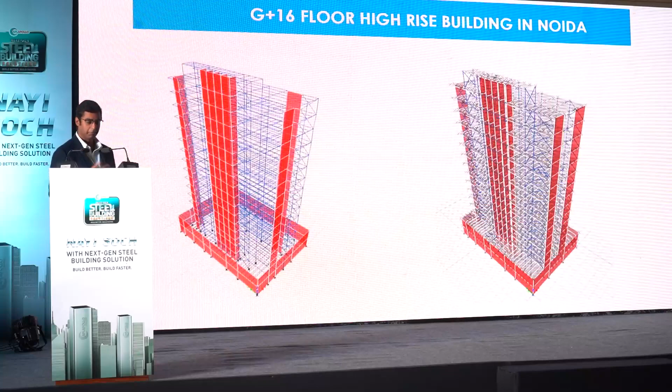That's when we got in touch with Apollo. They not only supported us in terms of confirming that they will be helping us procure cut-to-length size pipes, they also provided a lot of design support in terms of how the structure can be optimized. We could bring down the tonnage compared to the I section to tubes by about 18%, which was a game changer. We could achieve the mathematics Mr. Anubhav shared—about 18 to 20% more than concrete—and we got the project. Probably in the next conference I'll be sharing images of the finished building.

The building is going to get completed in 6 months, which of course cannot be done in RCC. The beam depth is much lesser, and there's 2% more usable area - that was another very big factor to convince the customer to go with tubes. The tonnage reduction was about 11 to 12% only in the columns and beams.

With now, since in this building we're using concrete filled tubes, it went up to about 18%. And of course, no hassle of shuttering and de-shuttering, since we're using a decking floor. Compared to I section, another cost which was not calculated in our quote was the encasing of the columns, so that's not being done, so by and by we could save the customer probably about 30% compared with the PEB section or built-up section, as we call it.